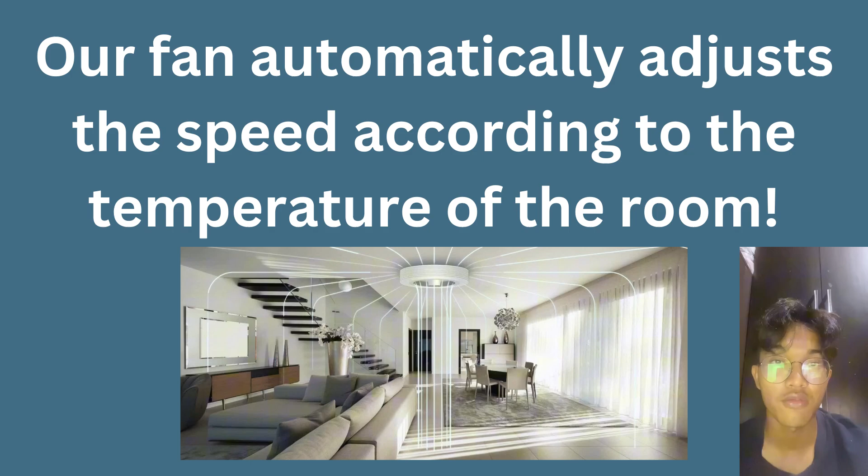efficiency. This project is a collaboration by our team, which consists of Nunila binti Sabini, Muhammad Hazim Aiman bin Yusuf, Muhammad Afiq Hazik bin Muhammad Taufik, Siti Nuraipah binti Jumatsah, and me, Wan Shukri bin Abdullah.

The background of our project focuses on the growing impact of global warming on everyday life, especially here at UNIMAS. Over recent years, the university has experienced noticeable increases in temperature, affecting the comfort and productivity of students and staff. Recognizing this challenge, UNIMAS took proactive measures to enhance the campus environment. One of the key initiatives was the installation of ceiling fans, especially in heavily frequented areas such as the student pavilion and various campus cafes.

These fans not only help to reduce the heat, but also create a more inviting and comfortable space for students to gather, study, and relax. By promoting natural cooling, we aim to improve the overall atmosphere and support student well-being. This is just one of the many ways UNIMAS is working to create a better, more sustainable future for its community. The primary issue we face is that the current ceiling fans at UNIMAS are inefficient.

Despite providing some relief, these fans still use a traditional design, which brings several challenges. If this problem is not addressed, the continued use of these outdated fans could lead to higher energy consumption and increased operational costs. On top of that, these traditional fans often experience damage within the first year of operation, adding to maintenance expenses. Our goal as a group is to innovate and improve the current ceiling fan system.

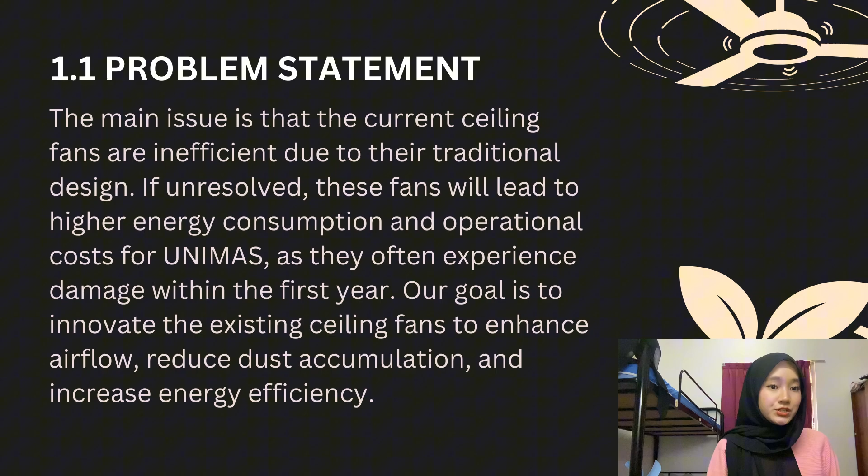We are focusing on designing a new fan model that enhances functionality in multiple ways. This upgraded design will provide better airflow, reduce dust accumulation, and significantly improve energy efficiency. By implementing these improvements, we aim to create a more sustainable and cost-effective solution for UNIMAS. Cause and effect analysis chain.

For the cheap material, we go to fan design and blade condition. And uneven blade goes to blade condition and poor maintenance. For the constant high-speed operation, we go to poor maintenance and inefficient motor. For fan design and blade condition, we go to insufficient airflow. Blade will go to dust accumulation. Poor maintenance and inefficient motor will go to not energy efficient.

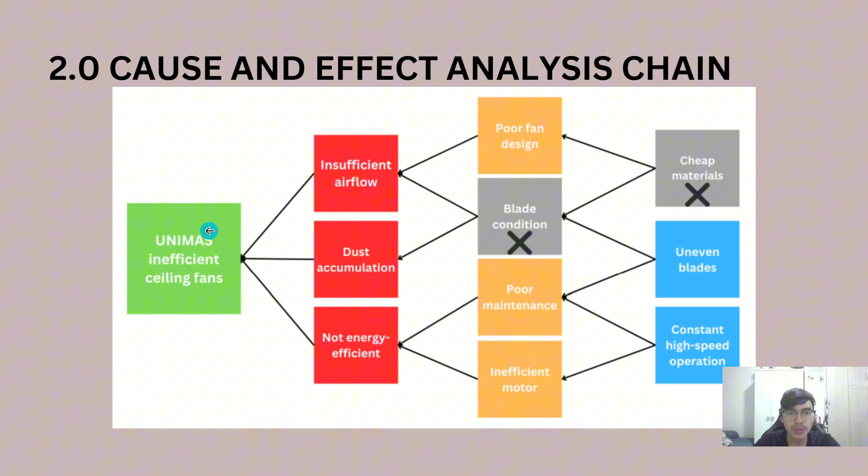These three will contribute to the UNIMAS inefficient ceiling fans, which is insufficient airflow, dust accumulation, and not energy efficient. This is a cause and effect analysis chain for UNIMAS inefficient ceiling fans.

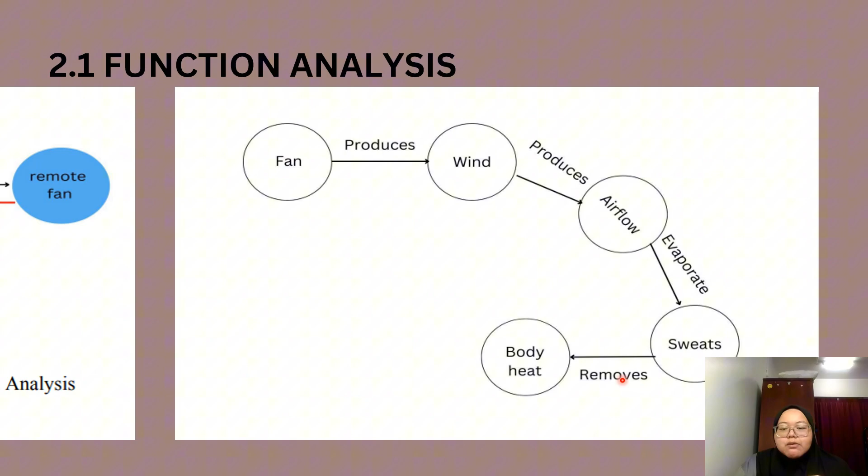This is the Su-Field. The problem statement is that traditional fans with blades require manual remote control, which is time consuming. Substance and field: substance 1 is the temperature air, substance 2 is fans, and last is the field, a force used to move the air and controlled by the remote. Existing system: first substance is temperature air, substance S2 is fans, and the field force is manually applied via the remote control to adjust the fan's speed and direction.

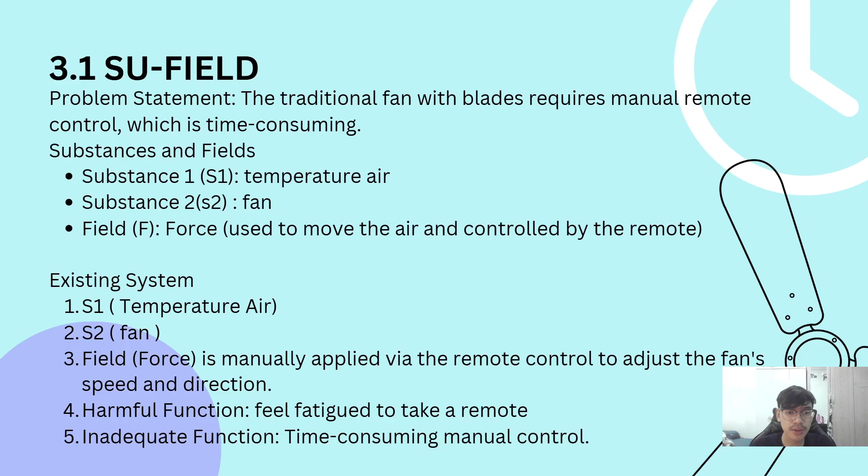Harmful function: fatigue to take a remote. Inadequate function: time consuming manual control. Modified system: for the automated field, replace manual remote control with automatic regulation based on environmental temperature. The improvement is a new field. F1 is an automatic temperature-based control system. New substance field interaction is automatic adjustment based on room temperature. The conclusion is an automatic control system creates automatic speed fans, enhancing air movement efficiency. This modernizes traditional fans, improving functionality and user experience.

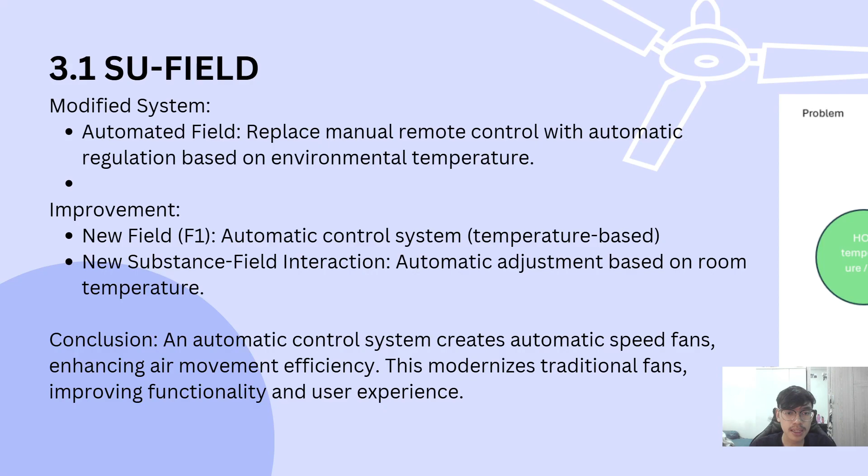This is figure 7 for the problem. When the user feels hot, they go to the manual remote, which connects to the fans (S2). So the fans will go to the user. This is the traditional setup for the problem statement.

This is figure 8 for the modified system. When the user feels hot in the environment, the system or auto remote will detect the environment temperature for the user. When the temperature is high, the remote will automatically adjust and send a signal to the fan. The fan will cool down the user when they feel hot, based on the environment temperature.

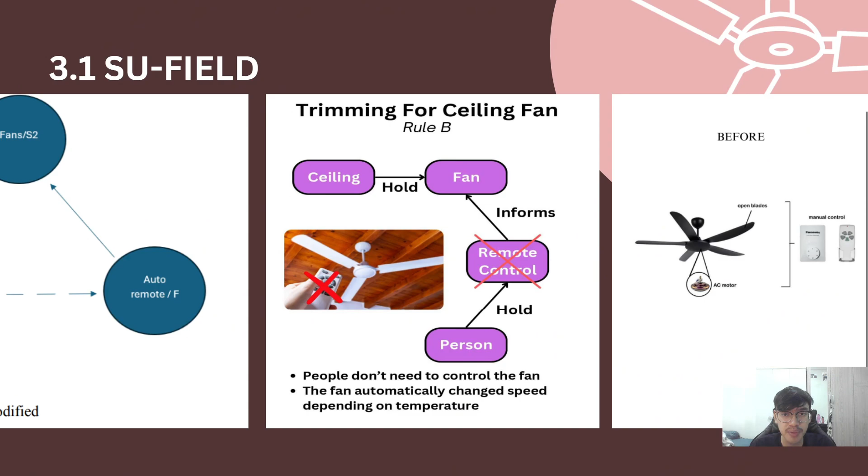This is a trimming for ceiling fans. Rule B: Ceiling holds fan, and the person holds a remote control in front of the fan, but actually people don't need to control the fan. The fan automatically changes speed depending on temperature. This is a trimming for the ceiling fans.

The before diagram, figure 9, shows the manually traditional fan. This uses manual control through numbers 0 until 5. After that...

Figure 10 is the after, which is the modified version. We use a fan disk, air filter, and digital temperature sensor, which can detect the temperature environment of the room, along with AI voice recognition mode and a BLDC motor.

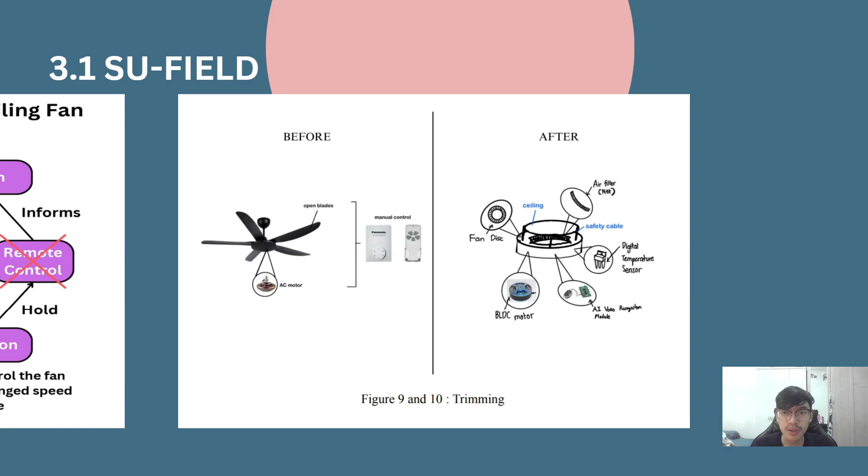The AI voice recognition mode works when the user feels hot — the user can directly talk to the fan to inform it, and it can adjust the speed accordingly. This is a diagram for the future modified fans.

Engineering contradiction: in our project, we identified an engineering contradiction related to the automatic ceiling fan system. If manual or remote control is removed from the ceiling fan system, it will increase the overall productivity of the system, as the fan speed will automatically adjust based on room temperature. But this will increase the complexity of the design, as additional technology like sensors and automated control are required.

To resolve this contradiction, we apply three inventive principles. First, principle 12, equipotentiality: replacing the open blade design with a disc-based structure to enhance safety and efficiency.

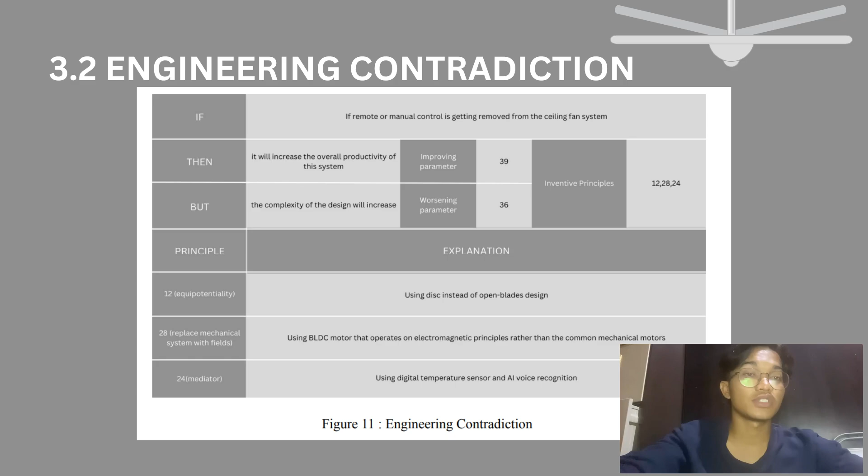Principle 28, replace mechanical system with field: utilizing a BLDC motor that operates on electromagnetic principle instead of a conventional mechanical motor.

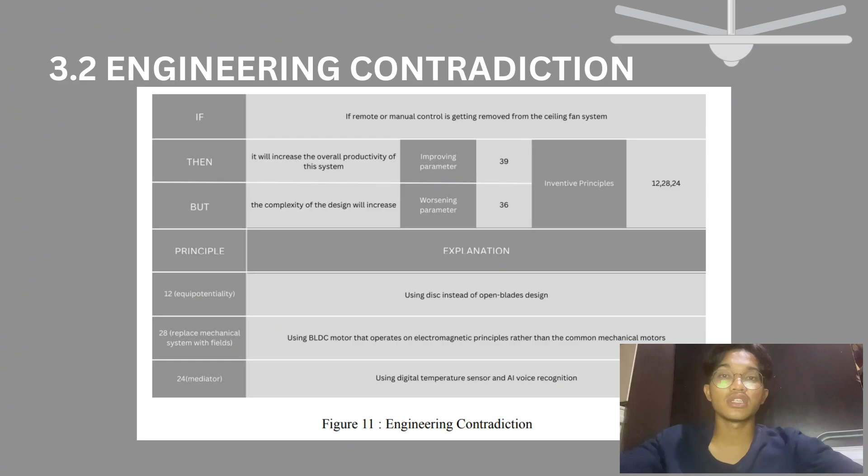Number 3, principle 24, mediator: incorporating a digital temperature sensor and AI voice recognition for more efficient and user-friendly control. This engineering contradiction approach not only addresses the identified contradiction but also significantly improves the overall functionality and design of our system. Thank you.

This is the function-oriented search, well known as FOS. In Table 1, you can see some of the key disadvantages.

Firstly, we have a remote control. Some remote controls might have many buttons and functions, which can be confusing for those who are not tech savvy. Next, we have an old BLDC motor that can produce noise pollution.

Then we have blades that can pose a safety risk, especially in households with children and low ceilings. Other than that, dust accumulation can trigger allergy issues, especially for people with asthma. Lastly, the fans take up space because of the big size of the blades.

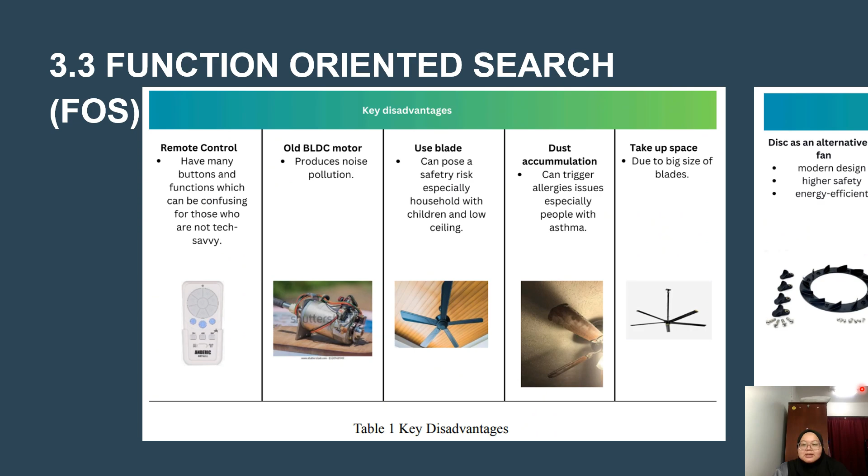Secondly, as shown in Table 2, these are the possible technologies. They include a disc as an alternative to an open blade, noted for its modern design, higher safety, and energy efficiency.

Next, the BLDC motor is known for its high performance, efficiency, durability, and low noise compared to regular AC motors, employing an AI speech recognition module that provides convenience and a futuristic approach where we can use our voice to control the fan. Next, a digital temperature sensor that doesn't need to be manually adjusted, as compared to outdated ceiling fans.

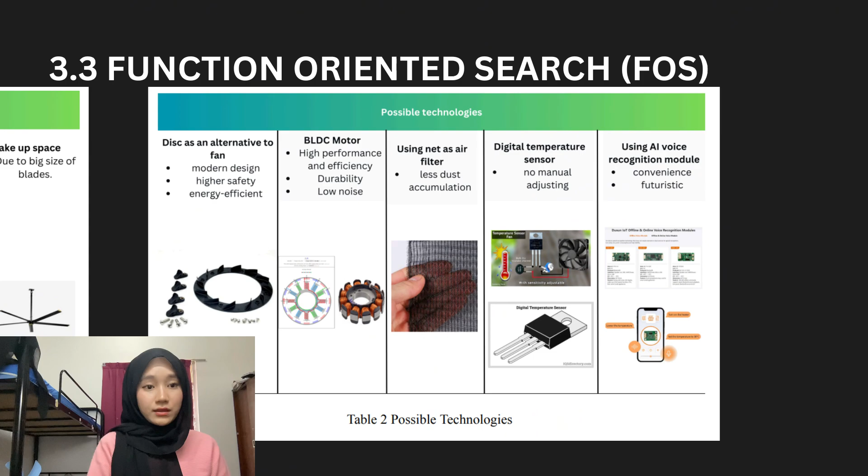Last but not least, a mesh/net filter, noted for minimizing dust accumulation — a feature that regular ceiling fans are lacking. In a variety of systems and devices, these technologies hold great promise for enhancing user experience, safety, and efficiency.